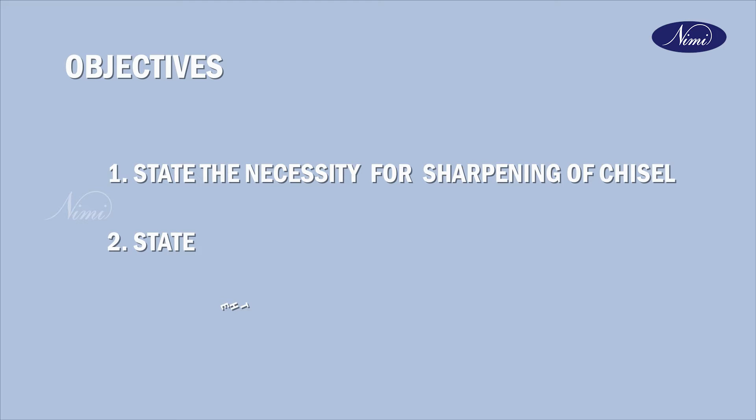Today we are going to learn about sharpening of chisels. Let us see the objectives first. Number 1, state the necessity for sharpening of chisel. Number 2, state the procedure to follow while grinding the chisel. State the safety precautions to be observed while grinding the chisel.

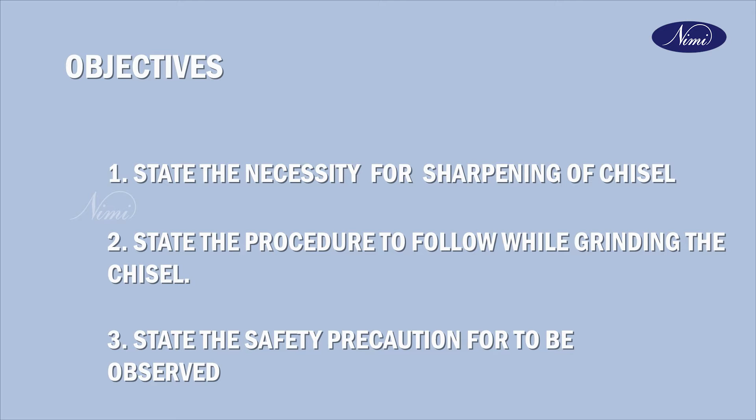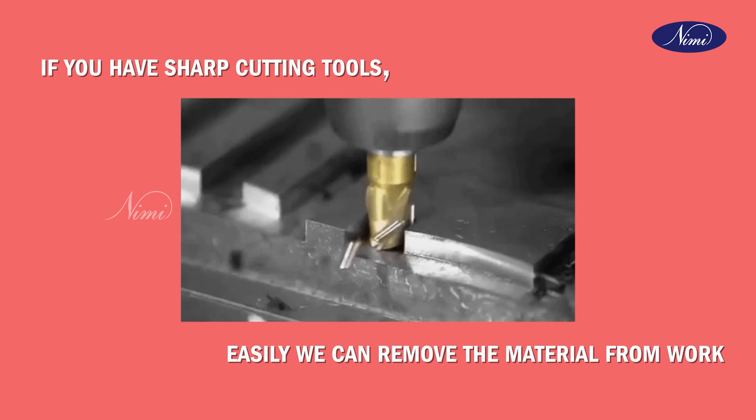In modern industry, there are many types of cutting tools used according to their profile. If we have sharp cutting tools, easily we can remove the material from the workpiece. For an example, if a knife is sharp, easily we can cut the vegetables or fruits.

What are the advantages of sharpening of cutting tools or cutting edges? Number 1, easily we can remove the materials. Number 2, time is also saved. Number 3, no need of much effort to remove the material.

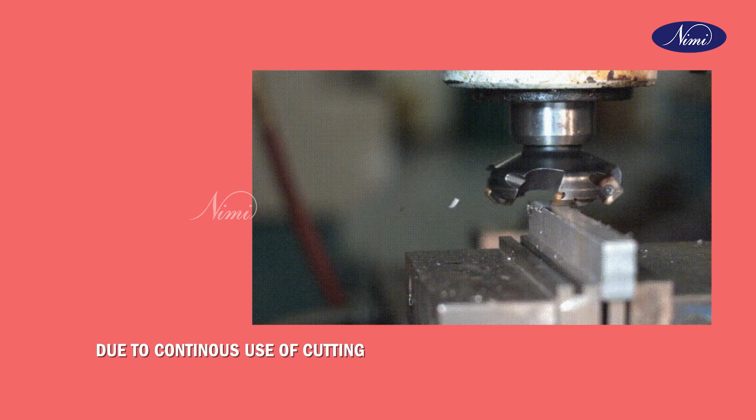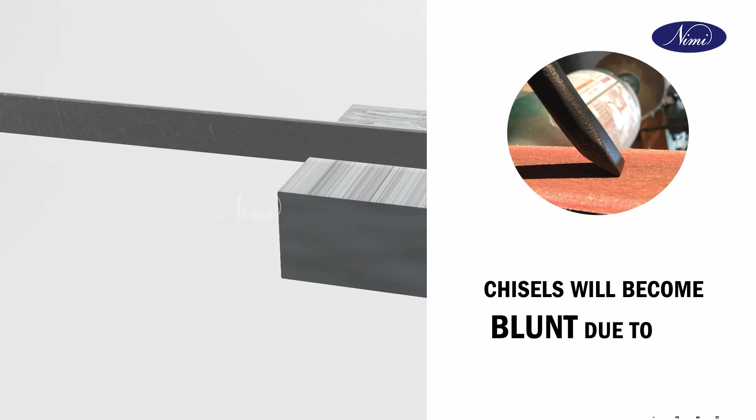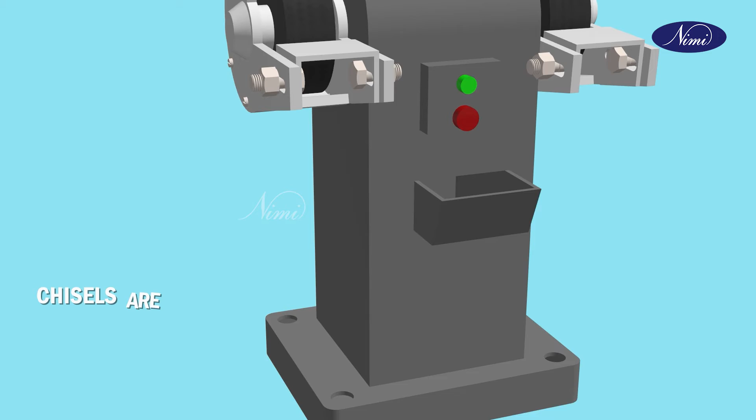Due to continuous use of cutting tools or cutting hard materials, cutting edges may become blunt. Chisels will become blunt due to continuous use. For efficiency in chipping, the chisels are to be resharpened regularly. Chisels are sharpened on grinding machines.

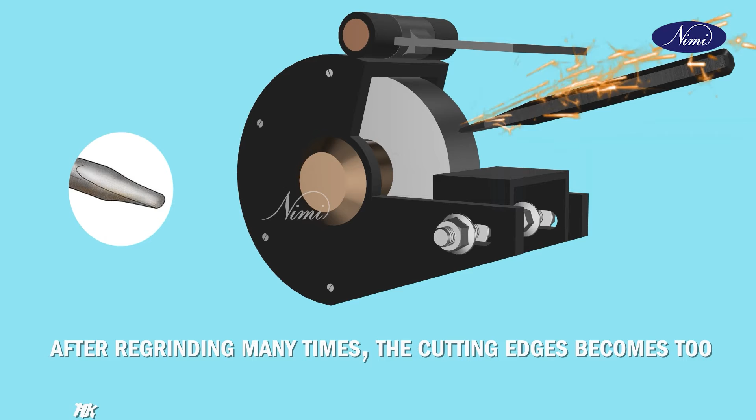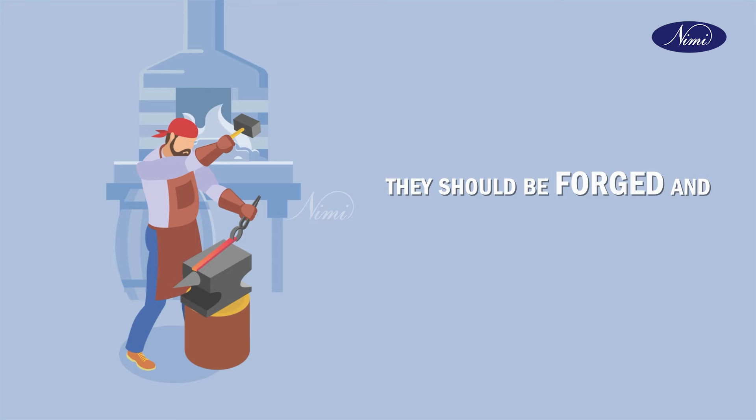After regrinding many times, the cutting edges become too thick. Such chisels are unsuitable for resharpening. They should be forged and brought to shape before grinding.

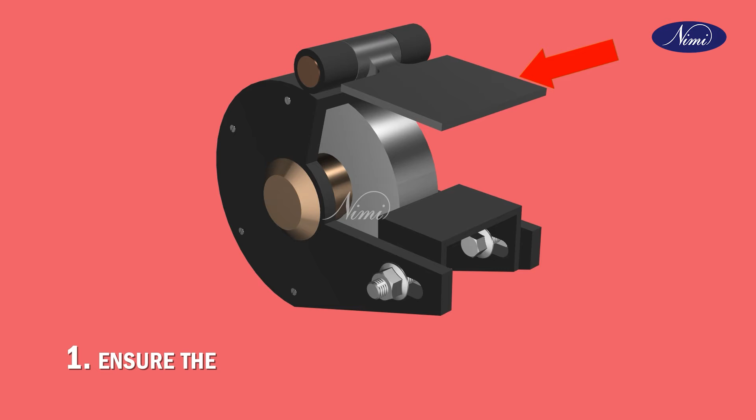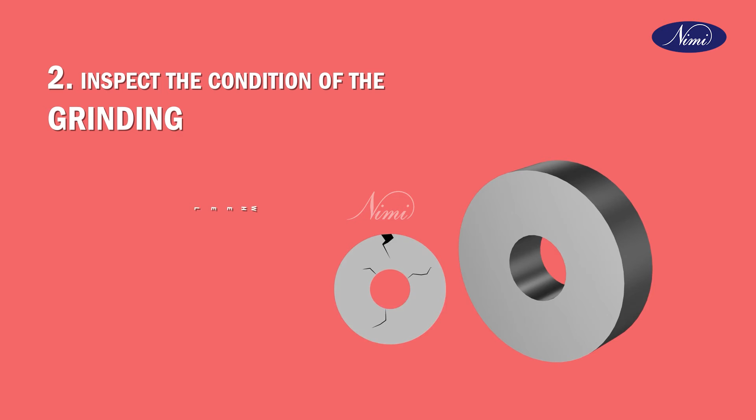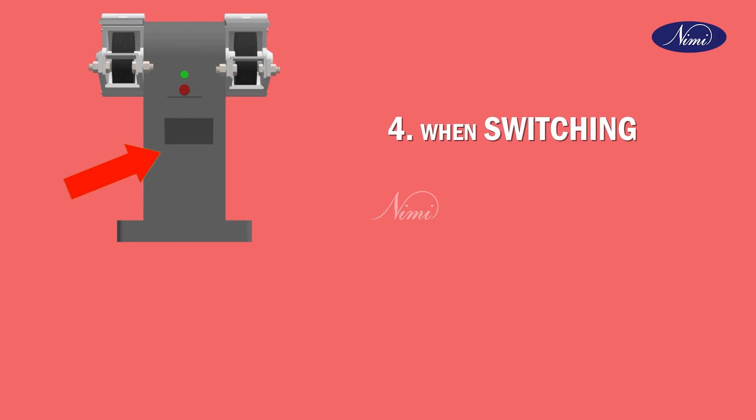Before commencing grinding, the following procedure should be observed. Number 1, ensure the wheel guards are in place and securely fastened. Number 2, inspect the condition of the grinding wheel for breakage or any cracks. Number 3, wear safety goggles. Number 4, when switching on the grinding machine, stand aside until the wheel reaches the operating speed.

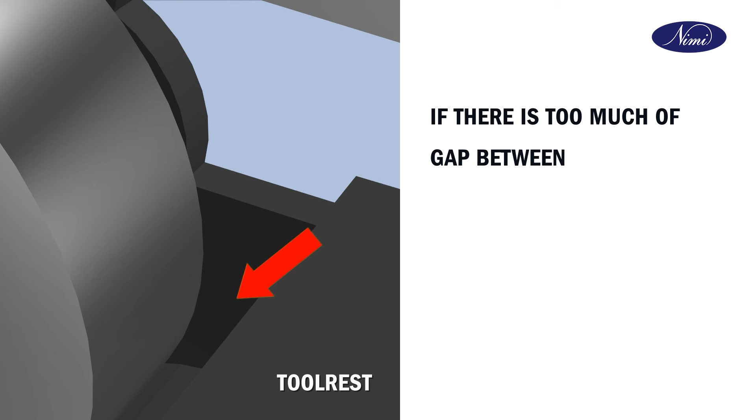First, we will inspect the tool rest. If there is too much gap between the tool rest and the wheel, adjust it and position it as close to the wheel as possible, especially 2 to 3 mm distance between the wheel and the tool rest.

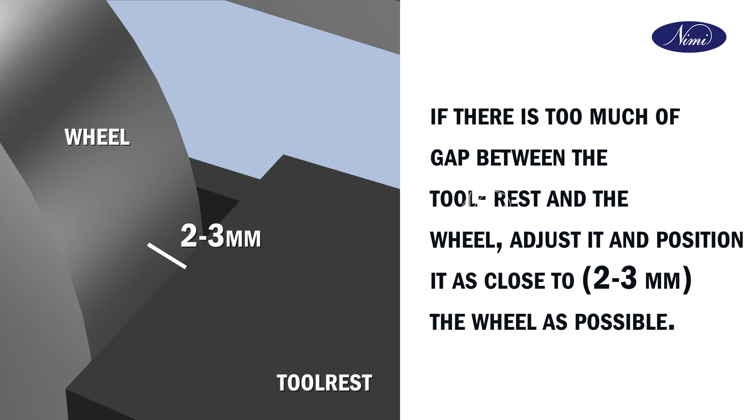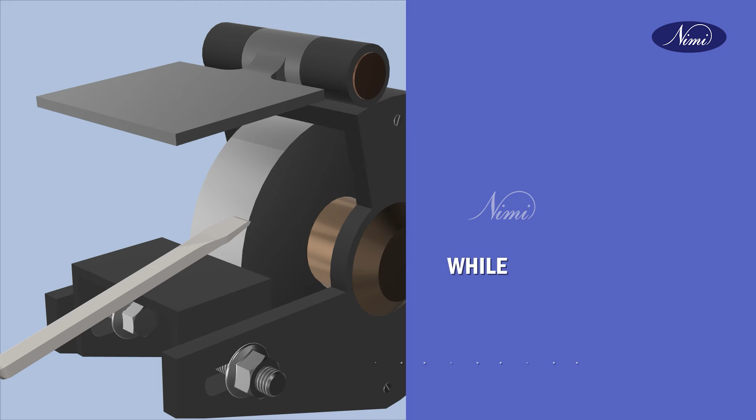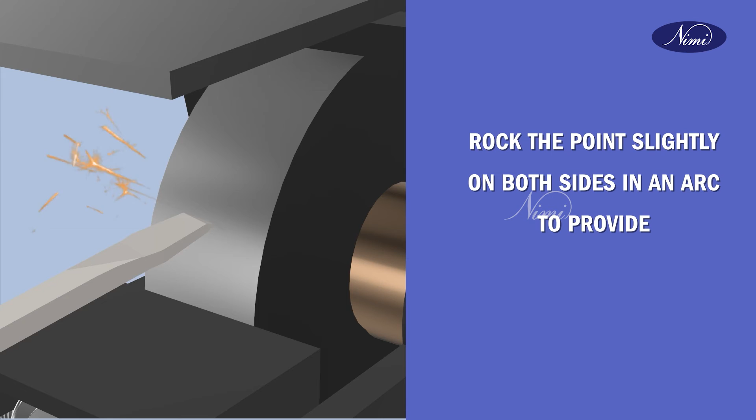Ensure that there is sufficient coolant in the container. While grinding, rest the body of the chisel on the tool rest and allow the point to touch the wheel. Rock the point slightly on both sides in an arc to provide a slight convexity at the cutting edge. This will help to avoid digging in the sides while chipping.

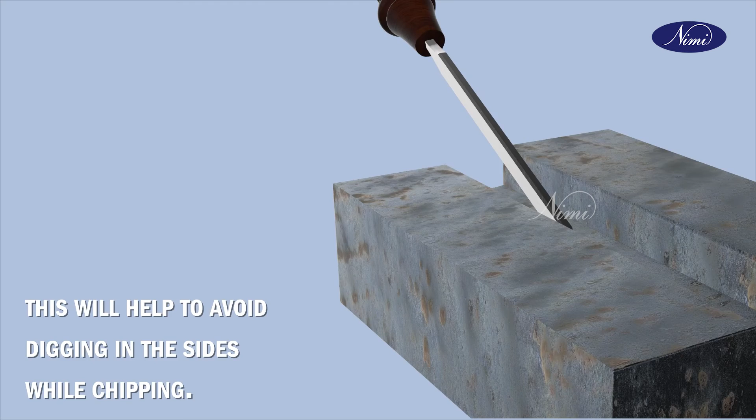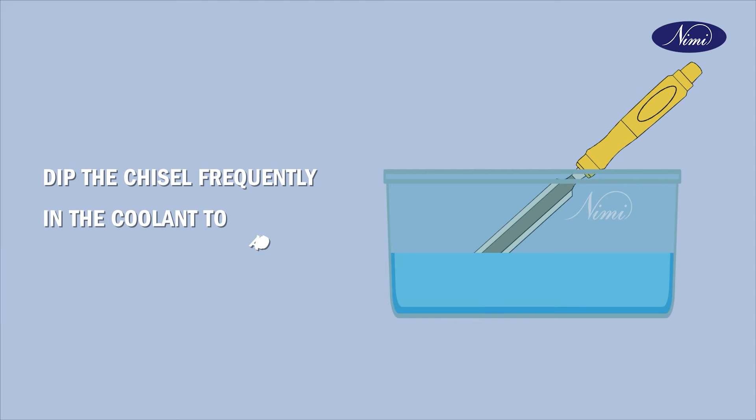Keep moving the chisel across the face of the wheel to prevent formation of curves and grooves at the cutting edges. Dip the chisel frequently in the coolant to avoid overheating. Overheating will draw the temper of the chisel.

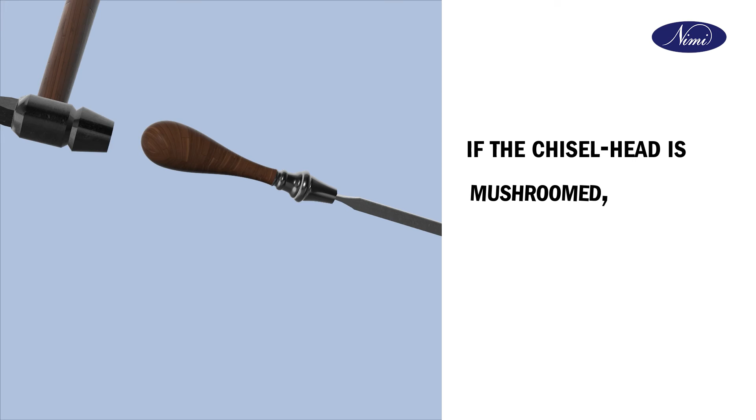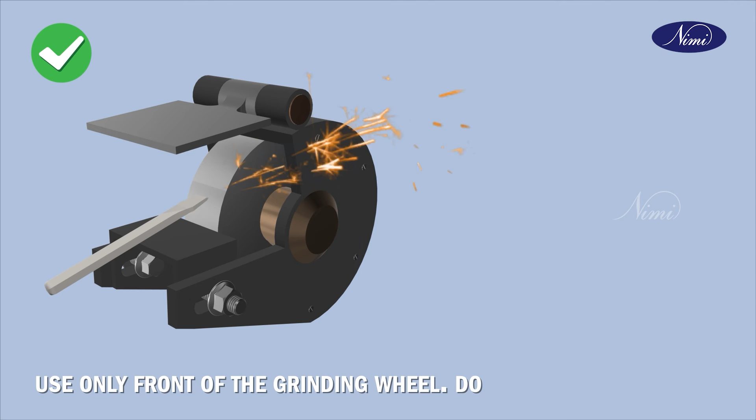If the chisel head is mushroomed, it should be cleaned or ground by using the grinding machine. Use only the front of the grinding wheel. Do not grind on the sides of the wheel.

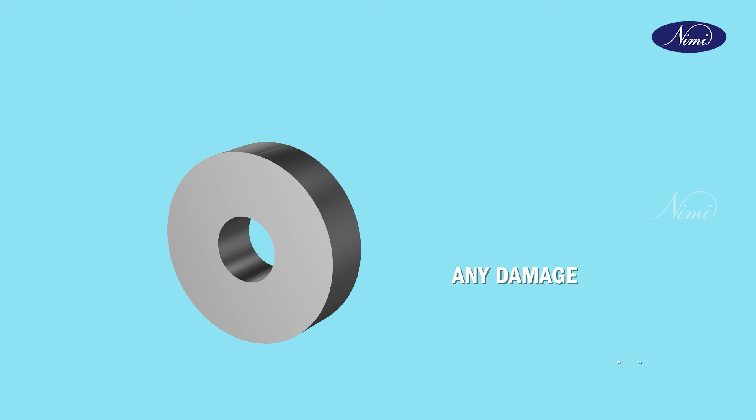Precautions to be observed while grinding: use goggles while using a grinding machine. Any damage to the grinding wheel, if noticed, should be immediately replaced. Do not use cotton waste or other material for holding the chisel while grinding.

I hope you have all understood about the necessity for sharpening of chisel, procedure for sharpening of chisel, and safety precautions to be observed while grinding the chisel using a pedestal grinding machine. We will see the next video. Thank you.